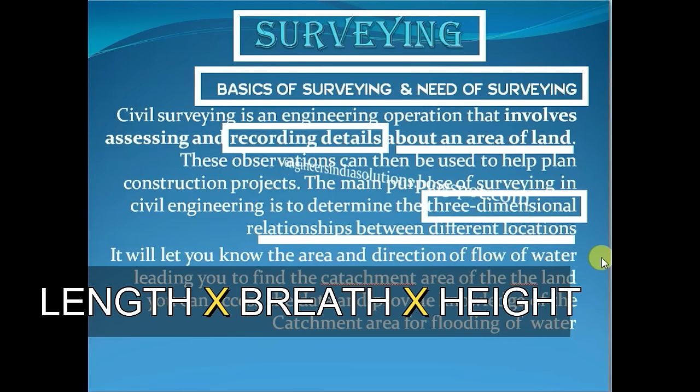Now, one thing that is given over here is the three dimension. Now, what is the three dimensional view over here? The three dimension relationship between the different locations. Now, it is meaning length, breadth, and height. So, if you have these three ordinates, that is the x, y, and z, so it is simply the three-dimensional figure.

Then what else do we get? We get to know the levels. Now from the levels, we can also define in the land in which side the water is going to flow.

The flow of water can be determined from the catchment area, and this will help you to find where the water is being led to and to which side. I'm talking about a very vast land at present, right? When I'm talking about the catchment area, it means many areas' water is being collected towards one stream, and that one stream is getting connected to many streams, and finally leading to an output and leading to a river somewhere or the other.

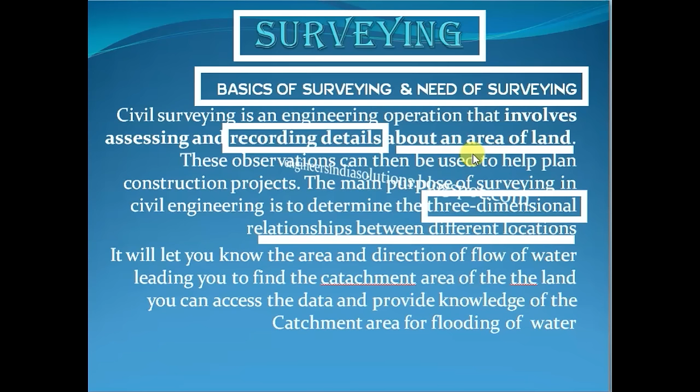So this is the procedure of the catchment area. For that we need to know the level - the lower the level, the water will flow that side. So this is all in this slide. Now we'll come down to the next slide.

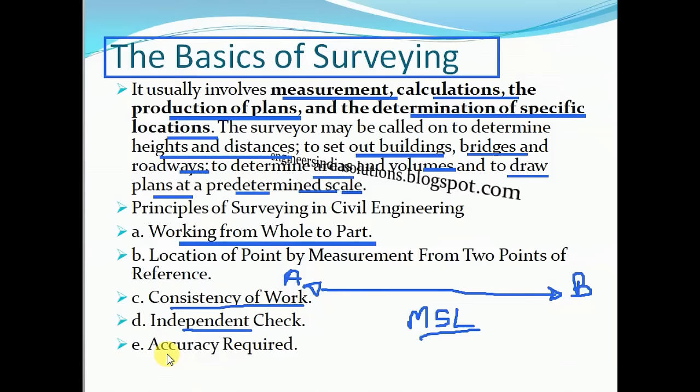So it is consistent work - this is the consistency or the work efficiency which is being done continuously, independently, and of course the most important thing, the accuracy is required in it. So these are the basics of our surveying part.

Now we'll come to the types of survey, that is basically in civil engineering. Then in this we have the chain survey, we'll be doing it. Then we have the plane table, the compass, then we have the tacheometric survey.

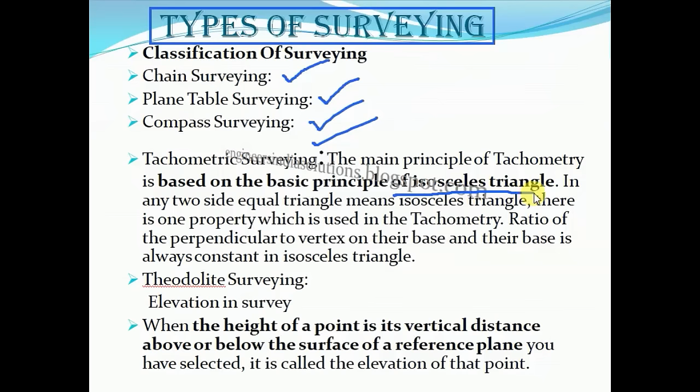In this we have to form a triangle, normally an isosceles triangle. We have created an angle over here, and that angle is being led over here as well as this side over here. So from this point, two angles are emerging, and we have this center point as A, from where the ray is emerging. So if you notice, over here I have written D1 and then D2, and the distance that varies over here is of course x1 and x2.

So with the help of trigonometrical ratio we can easily take out these distances, and this is with the help of an isosceles triangle where we have similar triangles. So the first triangle formation is AX1, and the other one is AX2. So with the help of these two sides we can easily take out the distances. And as far as this is concerned, we have the perpendicular, we have the vertex, we have the base shown in the triangle. So this is dealing with the principle of tacheometry survey.

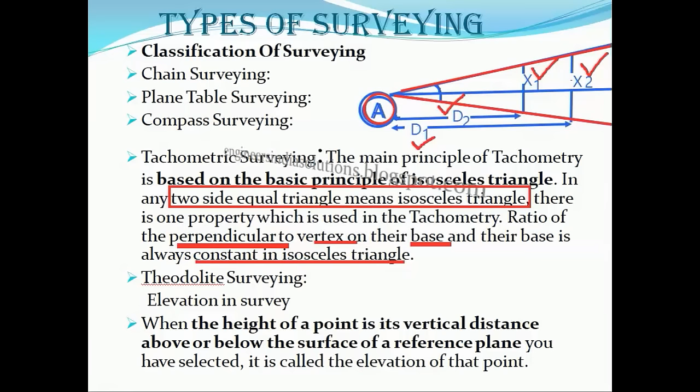Then we have theodolite, we'll go through it. Then elevation and level, this is with the help of a leveling instrument. We can take out even the vertical and of course the horizontal surface as well, and this may deal with something like the ground level - so you will not find the surface to be very flat everywhere. So if you place our instrument somewhere over here, then what we do is when we take the level, this will be our line of sight, and some levels could go down.

When we put an instrument to note down the reading and it comes higher, that means the surface is in a depression zone over there. So this is how we go about these things.

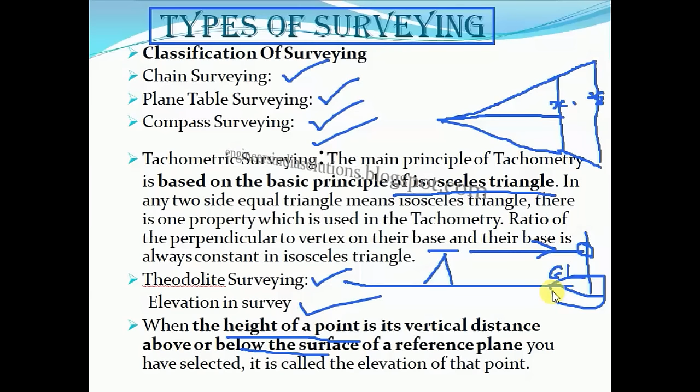This is normally used by people who have networks, like Reliance, for example. They take out aerial distances, what is the aerial distance where you can get your network. So this is for them.

Then we have different methods of doing survey, like chain survey, etc., as we discussed. And there are some more surveys we hear about mostly on TV channels and other media sources, like online surveys.

For example, surveying whether a certain product is good, whether you like it or you don't like it. Or if there's an election, you interview a person to find out who's going to win. Then there's a focus group.

A group or section of people give their views about it. Then panel sampling, where they take a panel and select a few people out of it who are refined and know about that particular topic. They talk to them to find out what we need.

Then there's telephonic survey, where calls are made. Then there are surveys sent by mail, where they ask you a few questions and you reply. Then kiosk surveys, and these are also another type of survey that we go along with. So here we have some of the surveys.

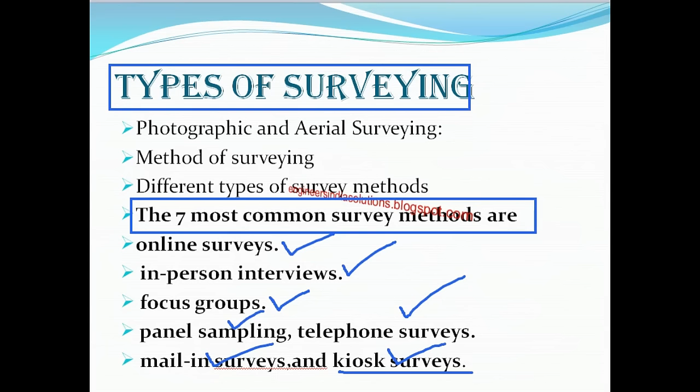Now we'll go through the duties of a person who conducts a survey on site related to civil engineering. A person who conducts a survey is known as a surveyor. He is usually an ITI holder, meaning he has technical knowledge.

If you are in India, you must know that it is after the 12th standard, that is 10 plus 2. It's a course of about 2 years which deals with surveying methods, and he conducts different types of surveys pertaining to land surveying only. What he determines is the position of the land, surveying the land and preparing a 3D map, using advanced software like AutoCAD. This is the main task of a surveyor.

Now, what are the basic principles of surveying? The basic principles of surveying always work from the whole to the part. Whenever you're doing it, you have to complete the part. If it's a road, you have to go right to the end. To locate a new station, you need at least two stations for measurements, minimum two stations.

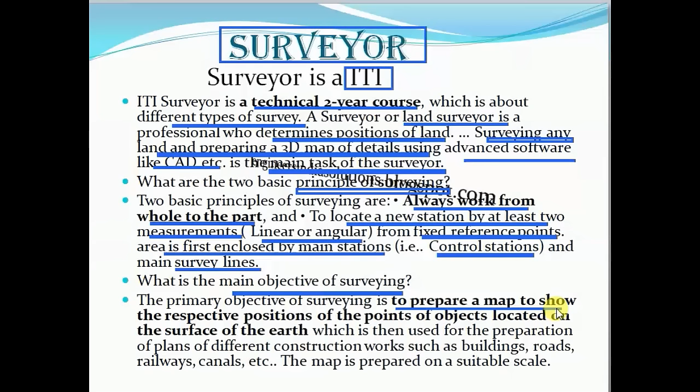So the main objectives of surveying, in short: prepare a map with all the data you have collected, then find the respective positions and points of the object located on the surface of the earth. You put it down on a map, and this is what we are going to read. It includes the level, the angle, and even the horizontal and vertical distances.

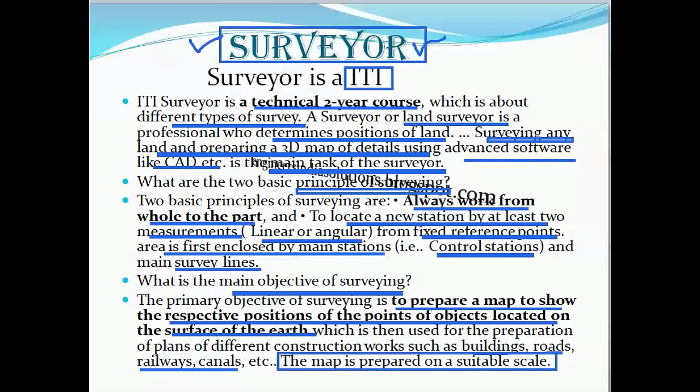They can be used for railways, canals, building, roads, and of course both are created at a particular suitable scale. These are some of the duties of a surveyor, a person who performs surveying at the field work. This is also done by diploma engineers in India, and they are very efficient and well technically trained. It's important that this data be collected and then put onto the records of the particular department or agency on whose behalf we are working.

Now we'll talk about the traversing method, which is vastly used in surveying. You can go through it; I'll just point out some of the key points. We'll go through all these methods in the future, whether it be traversing, finding height, elevation, point determination, angle, distance, or anything related to taking dimensions and observing the next point for our survey.

One of the words used here is geodesy. It means relating to geological conditions - ups, downs, angles, and everything. Then it involves placing stations along a line, and we observe the next point with reference to the previous one. The first point is kept as a benchmark, and we take the next point with reference to it.

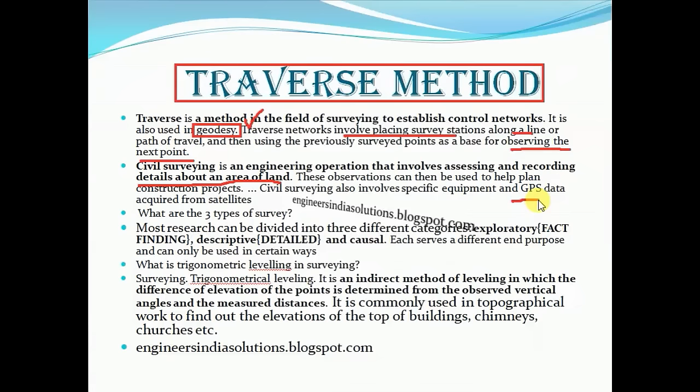Then what else do we do here? It involves recording details of land area. We also require GPS data, and you'll be surprised to know that surveying is at a very advanced stage. We have instruments that help us monitor a particular zone or angle, and we can find how many satellites we have in that area.

Then the categories are fact finding, descriptive, detailed. Then we have trigonometrical leveling of survey - that is the difference between two levels that we take from two points. Similarly, we can find the top of buildings, chimneys, and churches, or rather the height of them.